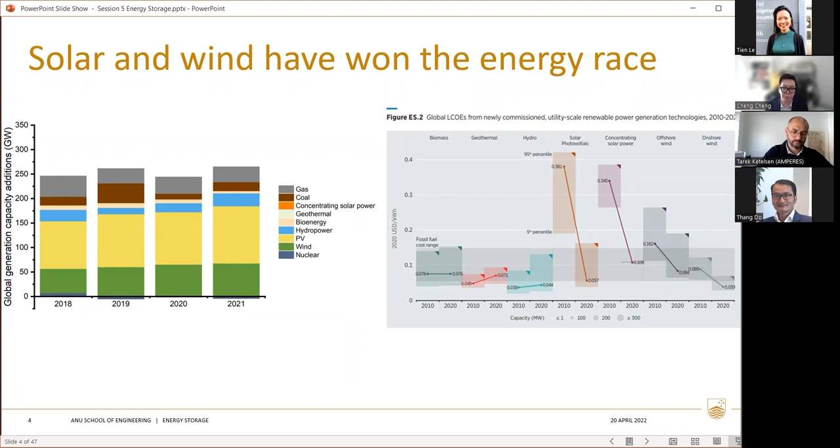First, why do we need storage? This graph shows the global electricity generation capacity addition per year for different technologies. It's clear that solar photovoltaics and wind now account for over half of the global generation capacity additions. The biggest reason for that is the large cost reduction over the past decade. As you can see here, solar PV and wind are now cheaper than fossil fuels in terms of electricity generation in most countries. And solar PV and wind will only become more and more important in the global electricity networks.

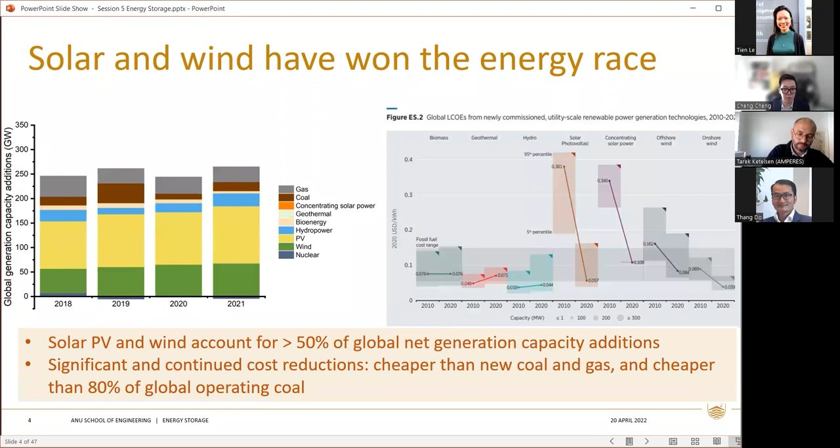Because if you consider other clean technologies, hydro, for example, deployment of new hydro is limited by the number of undammed rivers and some environmental pushbacks, and deployment of new nuclear, bioenergy, geothermal, and concentrating solar power (CSP) continues at low levels compared with solar and wind. It's really difficult to imagine these technologies bridging the large gap to solar PV and wind in terms of global annual deployment rates. And indeed, it's really difficult to see any timely solution to climate change that does not involve solar and wind doing most of the heavy lifting.

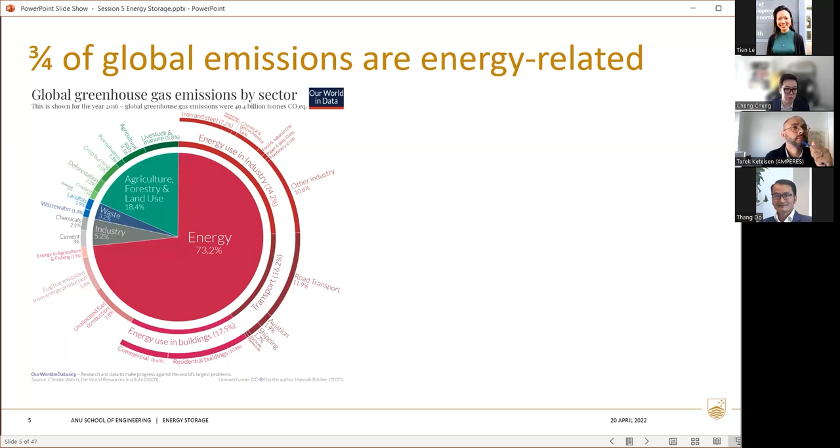The rapid and continued cost reduction of solar PV and wind have led to the wide deployment of renewables globally, as we just saw. That enables the decarbonization of not only the electricity sector, but the entire energy sector. So one pathway to decarbonize the entire energy sector is to first electrify everything that could be electrified. For example, we can replace the gas heaters in our homes with electric heat pumps, replace conventional internal combustion engine vehicles with electric vehicles, and replace blast furnaces with electric arc furnaces.

So when all these end uses are powered by electricity, and all that electricity is generated by renewable energy, solar PV and wind, for example, we could achieve a zero emission energy sector. But of course, there are sectors that are difficult to directly electrify, aviation and shipping, for example. But we will discuss these in detail later when we talk about hydrogen.

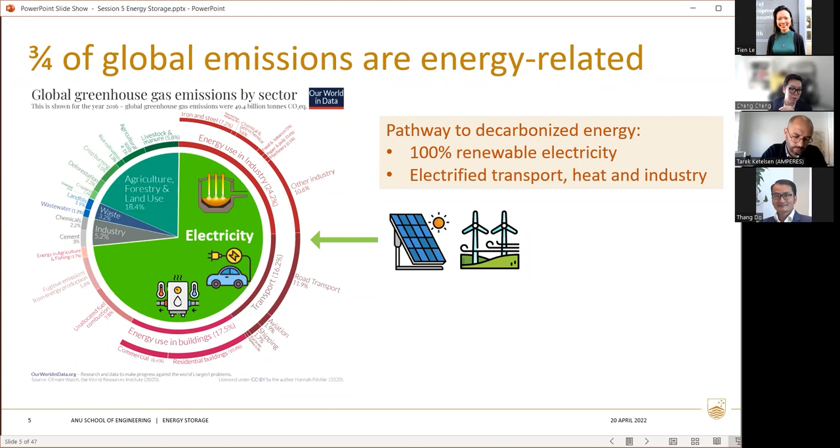However, the challenge is the variable nature of solar and wind. The time when the solar and wind electricity is available is not necessarily the time when the demand needs to be met. So what happens when the sun is not shining and the wind is not blowing? So in a future electricity grid with high level of solar and wind, you need additional balancing mechanisms to make sure that the generation can meet the demand in every hour or every minute or even every second.

And the measures to balance solar and wind include flexible generation, like hydroelectricity, which can be turned on when required to fill the gap between the supply and the demand. Storage: you can store excess electricity when the generation is higher than the demand, and the stored energy can be later recovered when the generation is not sufficient to meet the demand.

Interconnection: you can connect the regions that are hundreds or even thousands of kilometers away by high voltage transmission that can smooth out the local demand and local weather. And lastly, demand response, for example, load shedding or load shifting during occasional periods of low solar PV availability. And the lowest cost solution is often an optimal combination of several of these measures, but storage will be the key and will be the focus of today's session.

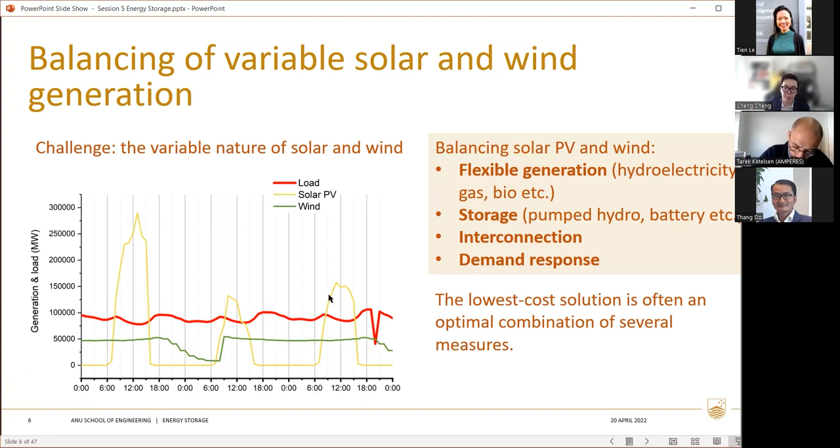So that brings us to the first storage technology that we will cover in this section, pumped hydro. So first, how does pumped hydro work? Essentially, it consists of two reservoirs with different altitude, and the altitude difference is what we usually call the head. And the two reservoirs are connected by a pipe or a tunnel.

So pumped hydro is essentially the reversing of a turbine to become a pump so that the water can be pumped from a lower reservoir to an upper reservoir when there is abundant solar and wind. And in the night when the wind is not blowing, you can then allow the water to come back down the pipe through the turbine to recover most of the electricity, just like how a conventional hydroelectricity works. And about 20% of the energy is lost in the round trip.

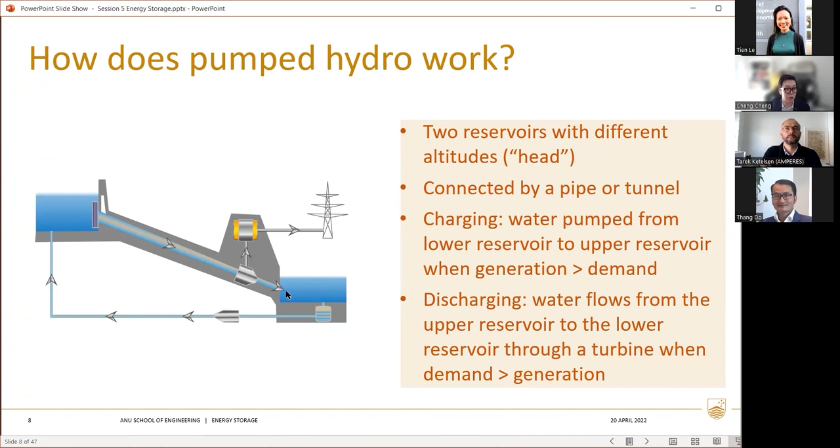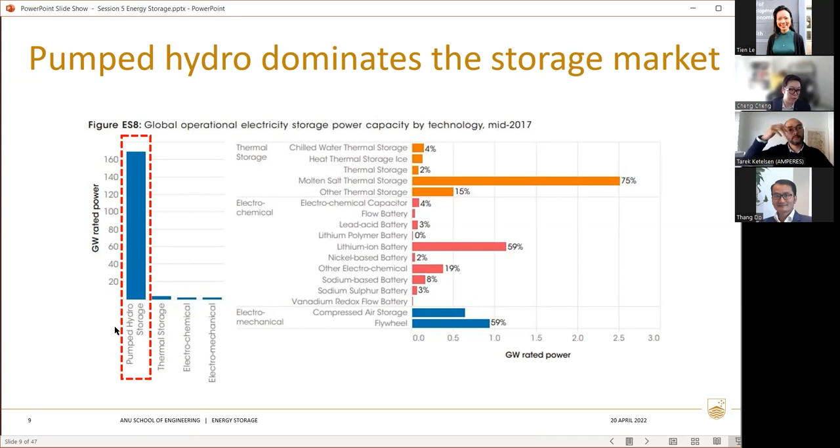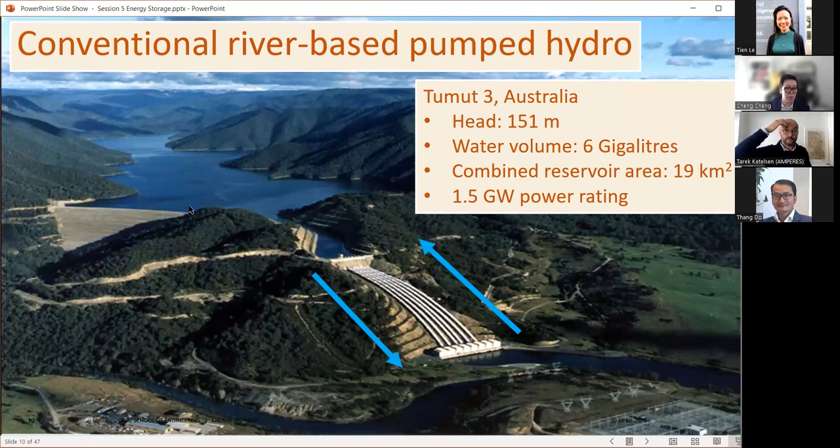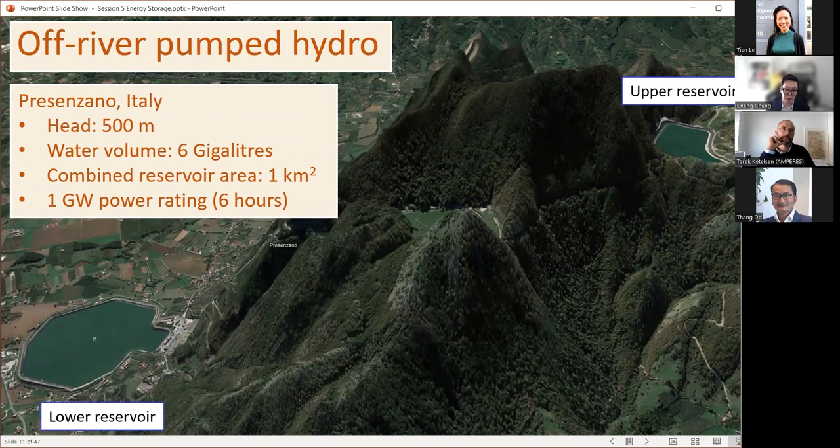So this is an river-based pumped hydro, but off-river pumped hydro is an alternative. There is no river in sight. So this is a good example from Italy. The head or the altitude difference between the upper and the lower reservoir is now 500 meters, similar water volume to the previous with 6 gigaliters, combined reservoir area is just 1 square kilometer, which is 19 times smaller than the previous on-river system. It's got a 6 gigawatt hour rating, and you can run it with 1 gigawatt for 6 hours flat out.

So comparing off-river and on-river pumped hydro energy storage, there are vastly more off-river sites, 100 times as many, because 99% of the Earth's surface is not close to a river, and the reservoirs are smaller compared to the on-river system, so much faster construction. And there's minimal environmental or social impact because there's no interference to existing rivers or lakes. And consequently, there are low or zero flood control costs because, again, you are not on the river.

And importantly, for off-river pumped hydro, the heads are typically better because you can double the head by putting the upper reservoir not in the river valley, but on top of the hill. And if you double the head, you double the power and you double the energy storage, but you don't double the cost. So large head is important for reducing the overall cost of the storage, but we'll talk more about the cost very shortly. And it's worth pointing out that off-river pumped hydro is basically for daily storage.

So if you consider a system, a pair of reservoirs with 100 hectares each, 25 meters deep, with a 500 meter head, they can operate at 2 gigawatts for 12 hours. So if you want seasonal storage, then the on-river system, which is much larger, is probably a better way to go.

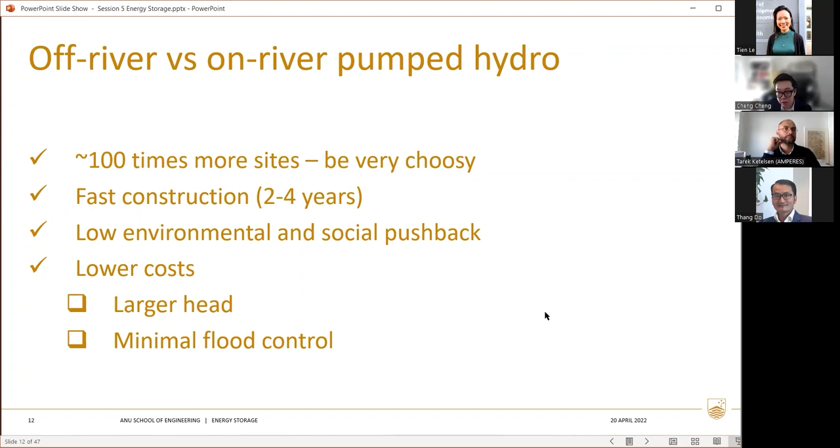So in 2019, our team at the ANU carried out a global assessment of viable off-river pumped hydro sites using geographic information system analysis. And we found 616,000 off-river pumped hydro sites with a combined storage potential of 23 million gigawatt hours. The latitude range covered in the global survey is from 60 degrees north to 56 degrees south, and urban areas and protected areas are excluded from the survey.

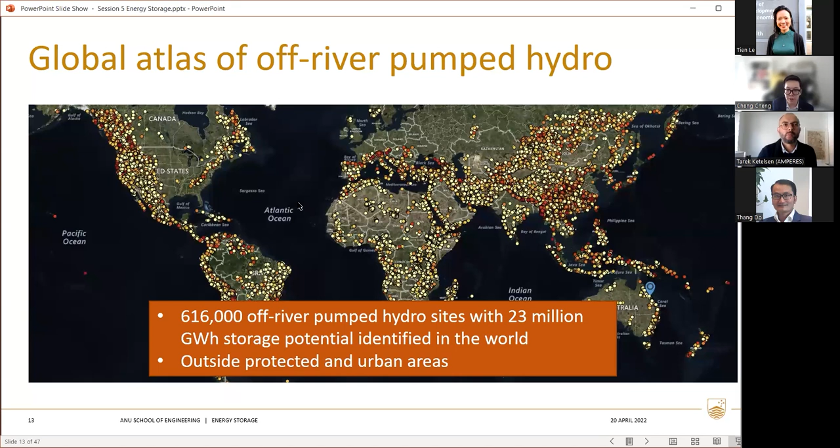So you can go to the Global Pumped Hydro Atlas, you can zoom, you can pan, you can look in your backyard, you can look in a place that you know well to investigate how it all fits together. In the Global Atlas, each site is categorized into a cost class based on its characteristics. Class A sites are the cheapest, and Class B all the way through Class E sites are 25% increments in cost above Class A sites.

If you look at the distribution of the sites across the cost classes, it actually changes with increased storage capacity. Class A and Class B contain the largest proportion of the 150 gigawatt hour sites, while the smaller sites are dominated by Class D and Class E sites. So the general trend is that the larger the system, the more economical it is, although there are exceptions. And the sites are widely distributed around the world.

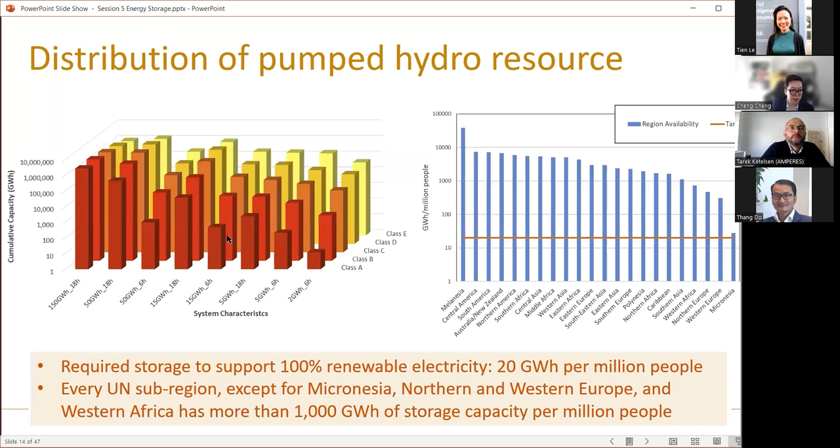This is an example of Southeast Asia: Indonesia, Philippines, and Vietnam have a total of nearly 40,000 sites. All three countries have over 1,000 gigawatt hours of storage potential per million people. This is a lot of storage, much more than needed to support a 100% renewable electricity grid in these three countries. Around 20% of the storage potential is from the lowest cost Class A sites.

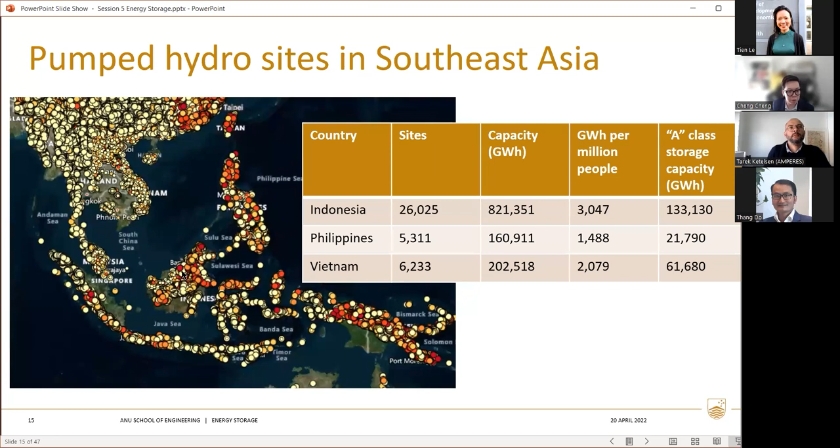You can see from the map that there is a large number of dots. The redder the dot, the lower the cost of that particular pumped hydro system. The dark red dots are Class A sites, and the light yellow dots are Class E sites. You can zoom in to see the upper and lower reservoirs. The upper reservoir is light blue, and the dark blue is the lower reservoir.

You can see the tunnel route connecting the two reservoirs, and you can even see the location of the dam wall and exactly what areas of land will be flooded. You can pan, you can zoom, you can click on either the reservoir or the tunnel route to get a wealth of information about the system and the system components.

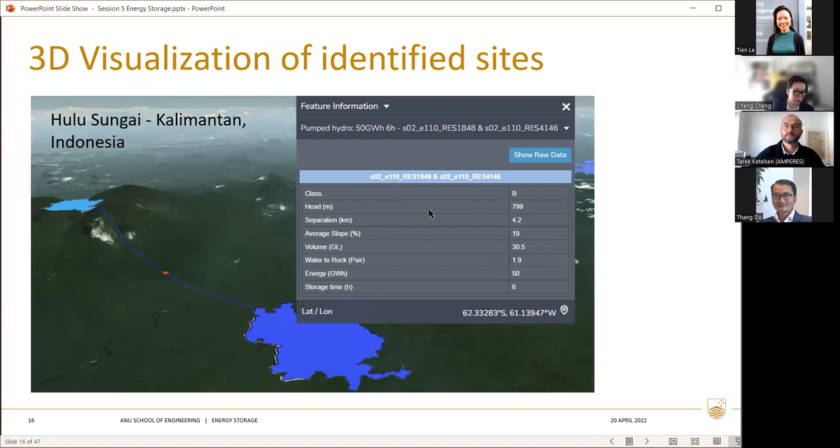This is an example of a 50 gigawatt hour system in Kalimantan, Indonesia. It is a Class B site with 800 meters of head. When you click on the tunnel route, it shows key attributes of the pair, for example, the head, the separation between the two reservoirs, the average slope, etc.

So moving on to the cost, the capital cost. The cost of off-river pumped hydro is dominated by the capital cost, and the capital cost can be approximately divided into an energy cost and a power cost. The energy cost is pretty much the cost of the two reservoirs, and the power cost is the cost of the water conveyance, the machine hall, the pump and the turbine, a generator, and the substation. So the energy cost and the power cost of the pumped hydro can be sized independently.

And starting with the energy cost. The energy cost is dominated by the cost of moving the rock to form the reservoirs, and the amount of energy stored is proportional to the head and the usable water volume of the reservoirs. So if we consider this on a per gigawatt hour basis, the energy cost of the pumped hydro will depend on the head and the water to rock ratio. The water to rock ratio is the ratio of the water impounded to the rock required to form the reservoir walls. So if you double the head or you double the water to rock ratio, they both approximately halve the effective cost of energy.

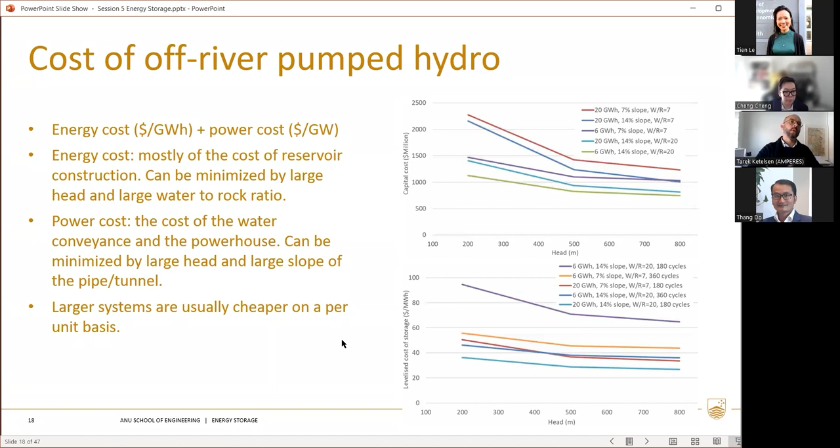And it's important to understand that the land and the water requirements of pumped hydro to support variable solar and wind generation are small. We've looked at Australia as an example, and in Australia, you will need about 3 square meters per person of reservoir area to support a 100% renewable electricity system based mostly on variable solar and wind. And this is much smaller than the area of the land required for the solar and the wind farms that the pumped hydro supports. And the water requirement is also small.

It's about 3 to 10 liters per person per day. And this is pretty much for the initial fill up of the reservoirs and also to make up the losses from water evaporation, in Australia's hot, dry climate. And this is really small quantities of water in the overall scheme of things. They're a lot smaller than the amount of water required for a traditional coal-based power system, because there are no cooling towers.

And this is something you probably know better than me. There were not a lot of pumped hydro projects in Indonesia, Philippines, or Vietnam, but there are proposals to build such systems to support a higher fraction of renewables in the grid. So it's really nice to see this momentum, and I'm expecting to see more projects coming in the next couple of decades.

So obviously in the presentation we've just heard, we've talked a lot about pumped hydro energy storage. The reason for that is that it is a very mature technology. If you look around the world at the moment, you will see that overwhelmingly the storage we actually have in our electricity system is predominantly provided by pumped hydro. But on the flip side, we're starting to see an increasing uptake of other forms of energy storage, particularly battery storage, with lithium batteries as a very significant amount in that category. That's really been driven by the uptake of electric vehicles. Importantly, the batteries in electric vehicles are lithium batteries.

So when we look at these other forms of energy storage alongside pumped hydro, we see batteries, particularly lithium batteries. There are other interesting forms of storage available, things like flywheels and compressed air energy storage. In the pre-readings for this energy storage session, there was a chapter written by Professor Lachlan Blackhall from the ANU for the book around energy transition. If you're interested in other forms of energy storage, I definitely encourage you to have a look at that chapter, because it provides quite a lot of coverage outside of pumped hydro and batteries. Although looking forward, we are going to see pumped hydro and battery storage as the dominant mechanism for providing energy storage in our electricity system.

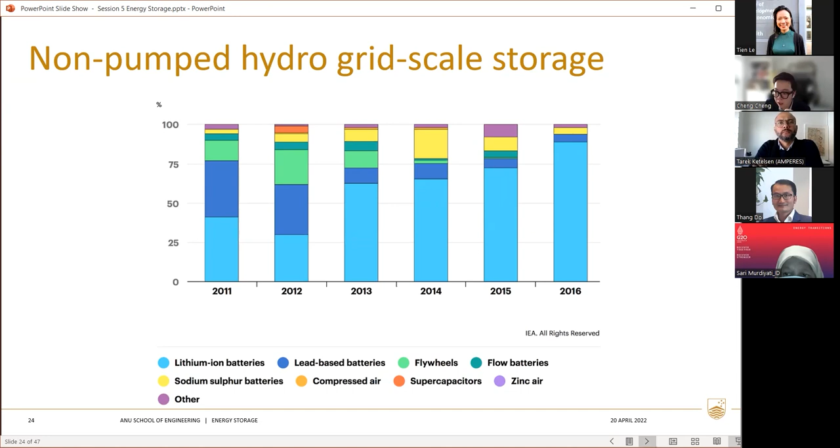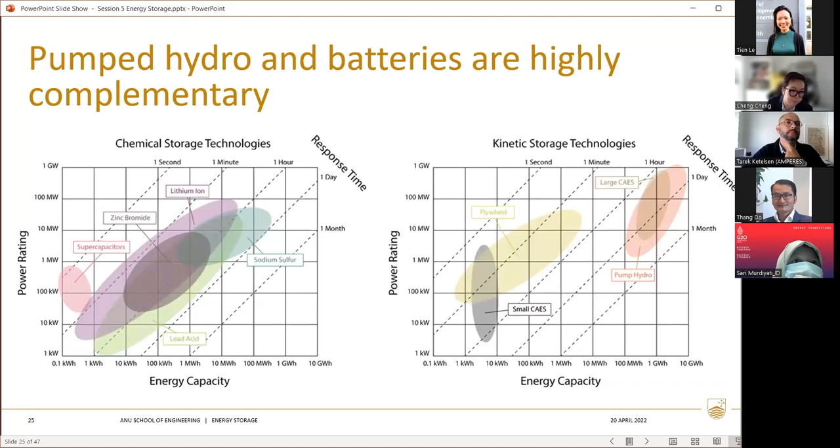As we've seen in many other technologies, particularly solar PV, over the last decade there has been a very significant decline in the cost of battery storage. So battery storage is now becoming one of the really dominant forms of energy storage in our grid. As the cost comes down, it becomes very cost effective to deploy, and that in turn leads to continued deployment of batteries, particularly driven by the use of lithium storage in electric vehicles. Lithium batteries in particular can have high power and a reasonable amount of storage capacity for the scale we're talking about. Because of their various sizes, they can be spread over a wide geography and put in many places in the grid where we actually need them.

And I think one of the big benefits of batteries is that because in many cases they are modular, using battery storage becomes quite scalable. So we can start to deploy storage in small amounts and then continue to expand the scale of that battery storage into our grid as we need it.

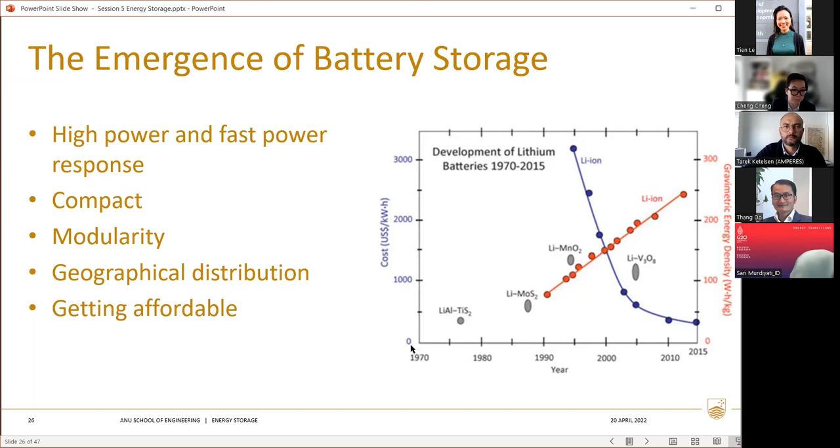So I'm going to touch very briefly on some of the battery chemistries that you come across. I'm by no means a chemist, so please forgive me that I'll talk about this at a relatively high level. I'd encourage you, if you're after more information about any of these chemistries, to get in touch with us through the forums that you've got access to, but also to consult the literature. There's obviously a very significant amount of literature about all these different chemistries.

So one of the first types of battery storage that was deployed, and has actually been around now for close to 160 years, is the lead acid battery. For many of us, we would typically see these batteries in our cars, not so much in our power systems. There has been use of lead acid batteries in the power system, but particularly in off-grid and remote installations rather than in grid connected applications.

One of the challenges of the lead acid battery is that it has a very shallow depth of discharge, and it doesn't like to be fully charged either. Lead acid batteries really like to operate between 30 to 70% of their state of charge, and any more or less tends to damage the cell. So of the nameplate rating of the energy storage, we actually only get to use about 40%.

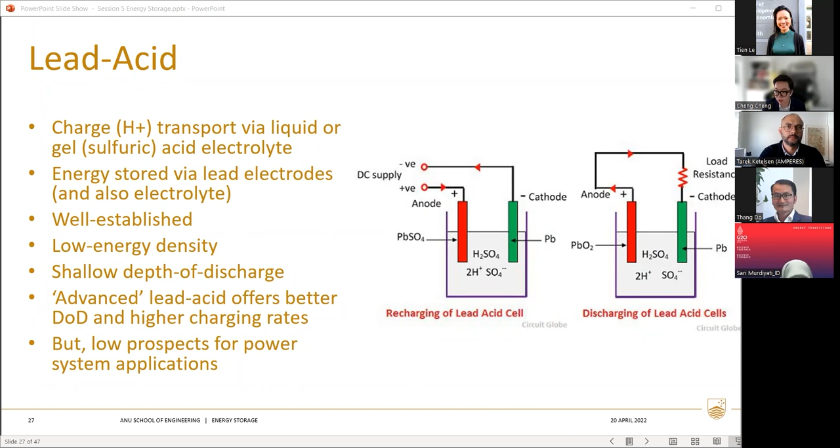I've already touched on the very significant role that lithium batteries play in the grid. Because of their high power to energy ratio and being relatively lightweight compared to other forms of storage, lithium batteries are going to be a very dominant form of energy storage in our electricity grid globally going forward. And because there's so much research and development going on to support the uptake of electric vehicles, we are seeing various different types of lithium chemistries, and there is still a very significant amount of innovation ahead in the development of other lithium chemistries.

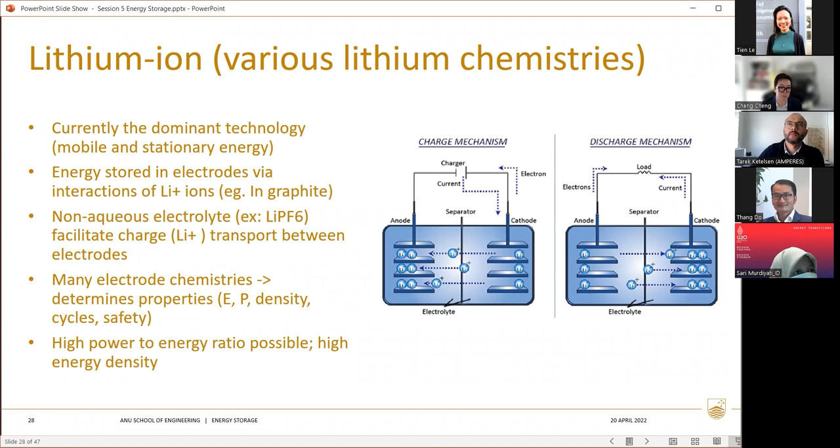The other form of storage that probably doesn't get as much coverage as it should, but will increasingly play a very significant role in powering our electricity and energy systems going forward, is flow batteries. Particularly chemistries like the vanadium flow battery, which was actually invented here in Australia, are probably commercially less mature. They've had a significant amount of research, but not as much commercial development, and they are manufactured at far smaller scale than lithium batteries.

The challenge with flow batteries, as with many other forms of batteries, is that they often contain materials which are not particularly environmentally friendly. So a broad challenge for all types of battery storage is going to be how we ensure that we can recycle and reuse batteries, so that we don't allow the battery materials to simply go straight to waste at the end of their lifetime.

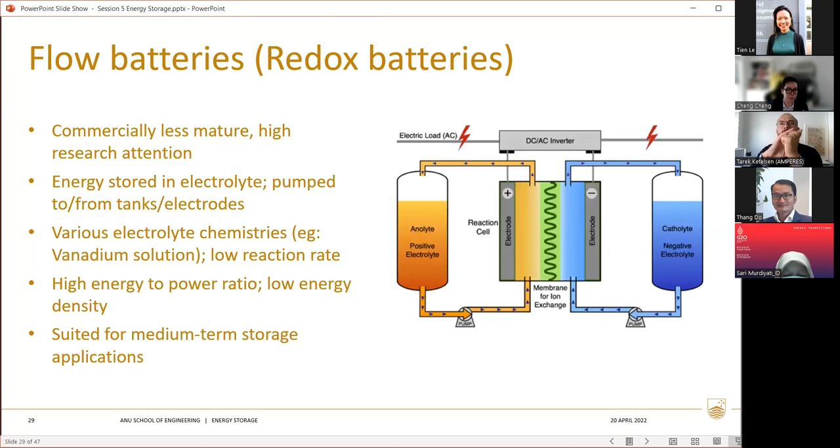And so one of the responses that the government at that time took was to actually install this battery storage next to the wind farm. And it has demonstrated globally the role that battery storage can actually play supporting the way our electricity grid works. So one of the really interesting roles that battery storage can play is that it allows us to regulate the frequency of our energy system. And so this frequency regulation is actually a requirement of our power system. And historically, frequency regulation has been provided by coal-fired or other thermal generation.

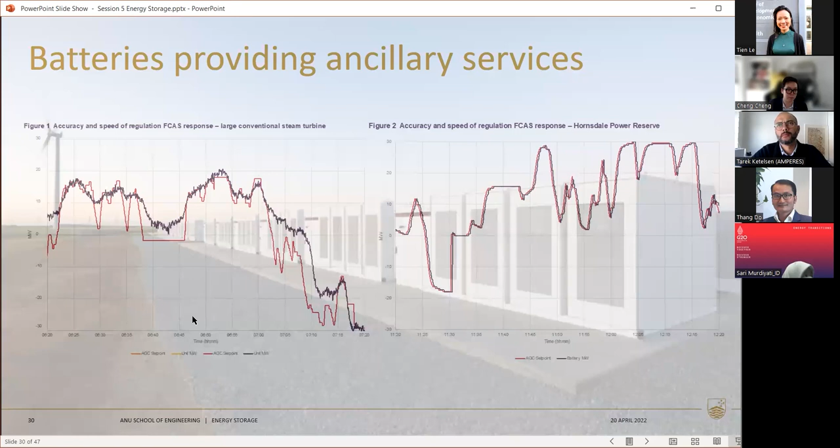And the other place that we are seeing a lot of storage is people installing battery storage in their homes. From 2016 in Australia, we've started to see people installing residential battery storage. People have been driven to install storage because they are keen to capture the solar that's on their roof, because in Australia we have very significant uptake of solar PV. In fact, we have the highest per capita adoption of solar PV of anywhere in the world. And so to understand the role that residential battery storage can play, our researchers at the ANU have done some interesting analysis around the Next Gen battery storage program, which has been rolled out in the Australian Capital Territory where we are based.

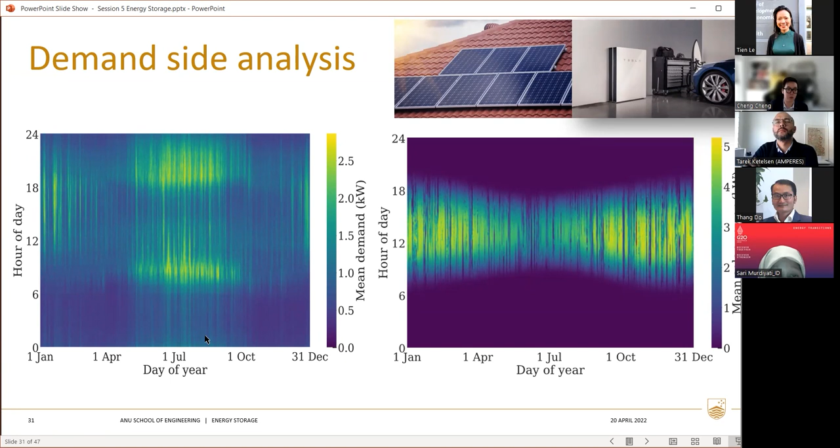And another type of storage I just wanted to highlight is obviously electric vehicles themselves. So when we started the talk, we were talking about how the uptake of lithium batteries has really been driven by the uptake of electric vehicles, because we have so much energy storage in these vehicles. And it's really important to think about how we can leverage that storage for the benefits of the system as a whole. And so, for example, we're actually using electric vehicles from our local government in order to participate in the FCAS market, which I talked a little bit about previously.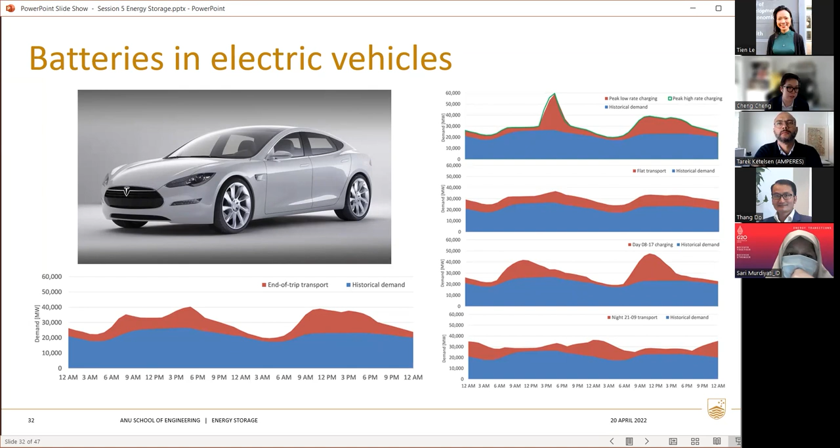And the final point that I just wanted to touch on is the fact that in many grids globally, we are actually seeing a transition away from thermal generation, so away from coal-fired and gas-fired power plants. And one of the challenges we face, which we also discussed before, is that as those large synchronous machines exit the system, we still need to ensure that there's a source of system inertia and system strength.

So inertia and system strength ultimately play a very important role in ensuring that we have frequency and voltage stability in our grid. So we are starting to see now earlier deployment of battery storage that actually allows us to provide inertia and system strength through batteries, through the inverters that connect the battery storage into the grid. And also, as discussed earlier, pumped hydro can also provide some of that system inertia.

And also, we can see that existing battery systems are actually very capable of providing this inertia and system strength alongside all the other important roles of batteries. So we have every reason to be confident that as we move to a 100% renewable energy system, battery storage together with pumped hydro will be able to play a very significant role in ensuring that we continue to see energy reliability and energy security.

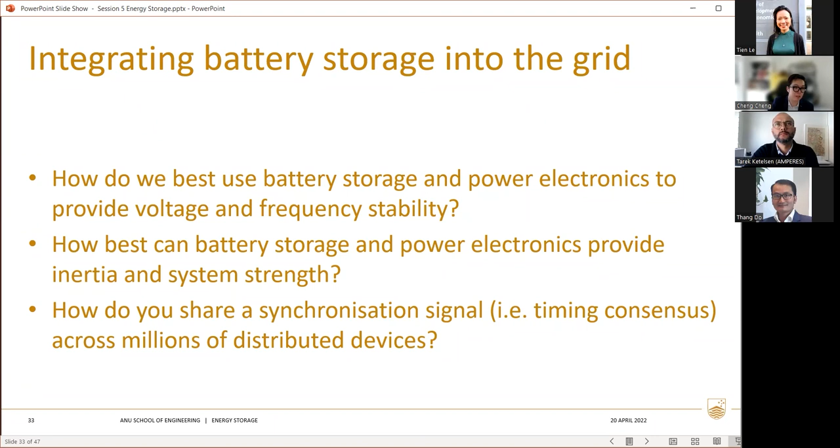So I think this really points to the broader role of what we think of as grid integration. If you think about the assets that we are seeing deployed in our grids, whether it's different forms of renewable generation, wind or solar, solar on people's rooftops, lots of different forms of battery storage, and electric vehicles, of course. How do we coordinate them? How do we optimize how they should all behave and interact so that we get the best outcome for everybody? That's something that's going to keep us busy for many years to come.

So, just moving on to the third topic. So now we've talked about pumped hydro, we talked about battery, and now we'll introduce hydrogen as another way to store energy. Although hydrogen for energy storage, or I should say hydrogen for electricity storage, is probably not the best option. I'll talk more about that very soon.

So if we look again at this energy-related emissions by sector, we know that power generation, transport, and industries represent a majority of emissions globally. And as we've discussed earlier, 100% renewable electricity and electrification is the viable pathway to decarbonize pretty much the entire energy sector. But I've also touched on very briefly earlier that there are sectors that are difficult to be directly electrified, like the iron and steel industry, chemicals and cement, and also freight transport.

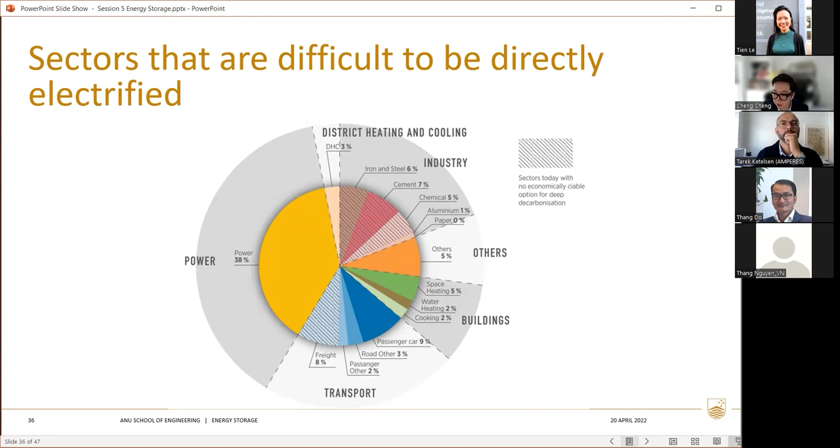And hydrogen can provide this opportunity to convert renewable energy into a source that can help to decarbonize these sectors that are difficult to be directly electrified. So hydrogen can be produced from water. Hydrogen is very light, and so it's not available in pure form in nature. And we need this process to generate pure hydrogen that we need for various applications.

So I will talk about the electrolysis technology in a moment, but basically it requires energy to split water into hydrogen and oxygen. But then when we are burning the hydrogen, this process will generate energy. And the good point about that is that there's no carbon associated with this process because it's just water vapor that will come out of the process, with energy released, of course.

So in terms of the properties of hydrogen, there are a couple of important points. The first is that the energy per unit of mass of hydrogen is quite high. It's 3 times that of gasoline. But on the opposite side, the energy density of hydrogen is quite low. It's only 1/3 of natural gas. So that's an issue we need to address.

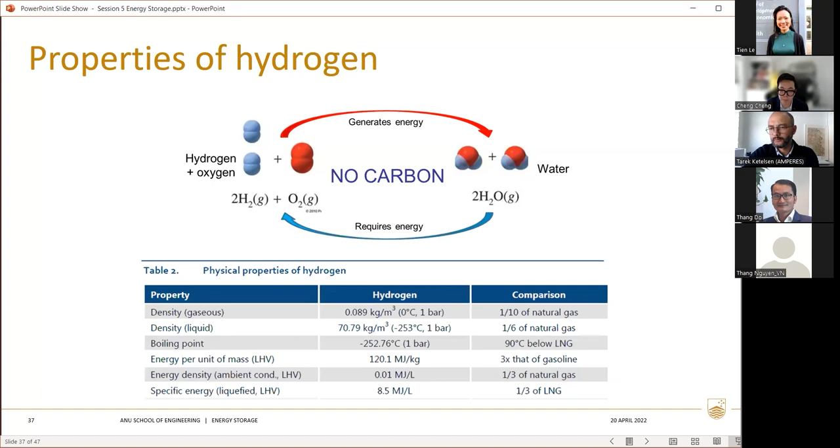So hydrogen could be produced from the electrolyzer using a process called water electrolysis. Again, I'm not going to talk about the chemistry here, but the basic idea is that the water is split into hydrogen and oxygen with the presence of the electric current. So currently there are 2 major types of electrolyzers, alkaline and PEM electrolyzers.

With the current technology, you will need about 70 kilowatt hours of electricity to produce 1 kilogram of hydrogen. But we're expecting to see the efficiency increase so that the energy requirement is reduced to less than 45 kilowatt hours by 2050. And it's worth pointing out that currently the majority of hydrogen is not produced via water electrolysis. Instead, it's produced from fossil fuels, natural gas and coal. But since we are heading towards a zero emission energy sector, these technologies would definitely need to be replaced.

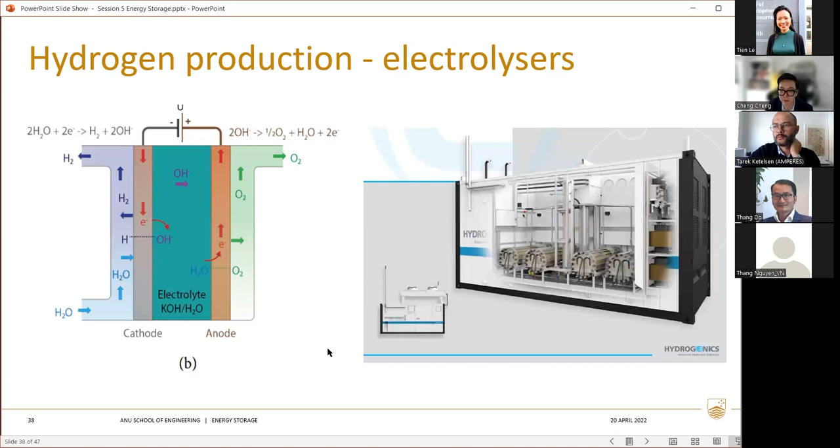And on the other end of the process, we need a technology to help us extract the energy from the hydrogen. This is usually done in a fuel cell, which generates electricity from electrochemical processes. And this energy can be used for heat or for other applications such as fuel cell vehicles or for power generation.

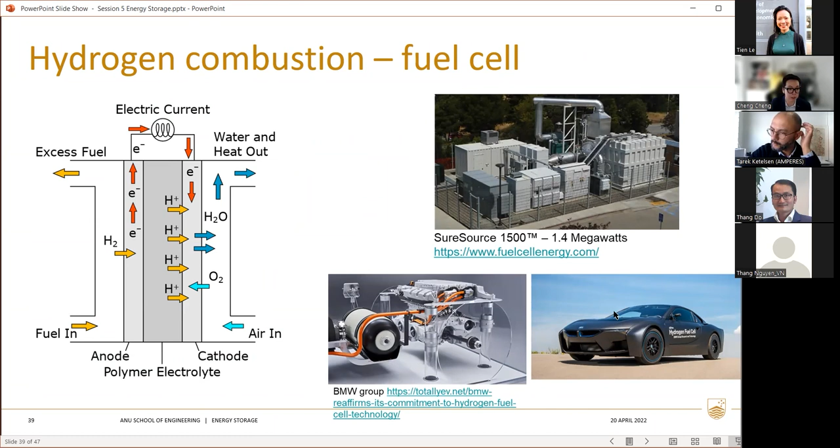So basically, the hydrogen or methane is used where the gas is used for heat or for power generation. You can think about this like another form of energy storage. So electricity generated from wind and solar is stored in the hydrogen or hydrogen derivatives, and then you can recover that energy at a later time.

So in that sense, it can also provide seasonal storage. So if you store the excess electricity from solar in summer and then use it in winter to heat your home, probably not particularly the case for Australia or Southeast Asia, but it could be very useful for Europe when they have very cold winters. And the second option is the industry which needs high temperature heat, and hydrogen can also be used as the feedstock.

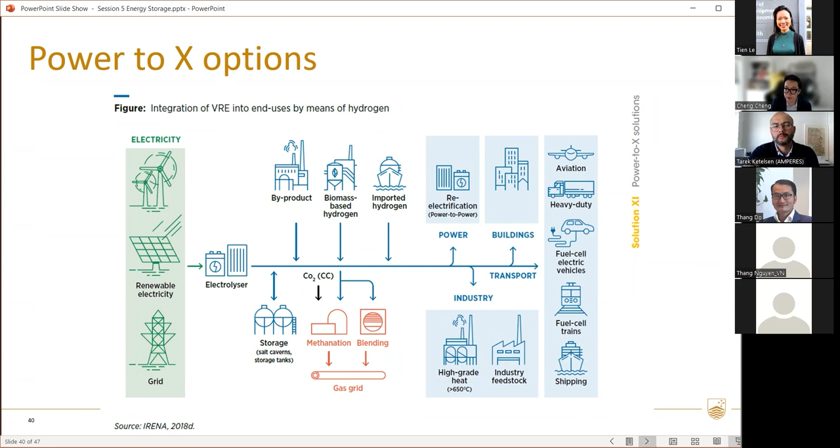So e-fuels and hydrogen derivatives are another potential application of hydrogen. They are basically hydrocarbon fuels synthesized from hydrogen and CO2 or nitrogen. So basically, they are good for the climate because they also extract carbon dioxide from the air. So basically, they are another type of zero carbon energy carrier. Of course, if the hydrogen is produced from renewable energy in the first place.

They can be very helpful because they have very good properties, very similar to their fossil fuel counterparts, because they have very high energy density. They are much easier to store and to transport, if you compare that with hydrogen, which has low energy density. And also there are a wide range of applications, including chemical feedstock, power generation, fertilizer production, and so on.

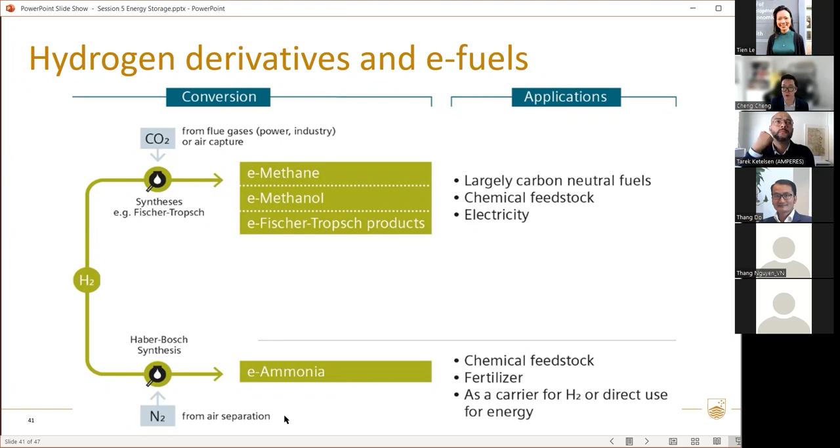But on the other hand, there are some critical challenges. The main issue is the efficiency. So basically, if you're starting with 100 units of electricity sent to the electrolyzer, you first lose 27% during water electrolysis. So 73% is roughly the current efficiency of the electrolyzer. And then the compression and also the fuel cell. And in the end, we get to around 29 units out of 100. So basically around 30% efficiency.

And if you consider the other option of power to gas, so blending hydrogen with natural gas or converting it to methane and then blending it with natural gas, we get to around 21 to 26%. So overall, these energy storage options are only about 20 to 30% efficient. So there is a big loss of energy in all these processes. And as a comparison, pumped hydro is 80% efficient and battery is 85 to 90% efficient. So it's very unlikely that hydrogen will be able to compete with pumped hydro and battery in terms of providing energy storage.

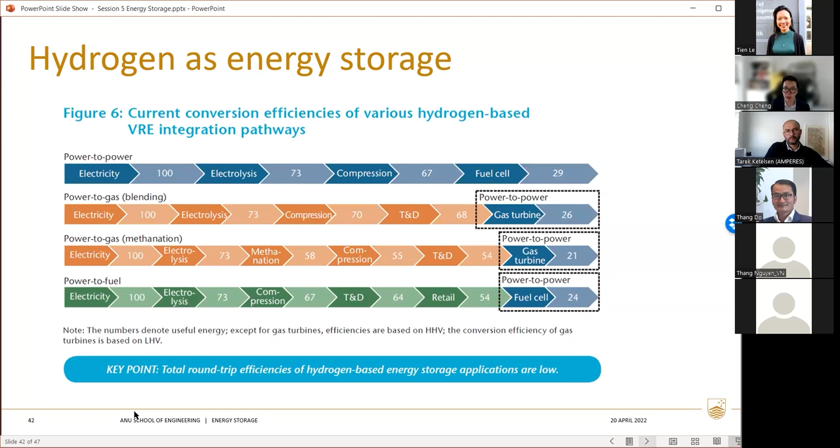And also some more information in certain applications. For example, we can look into transport, and currently conventional vehicles are running at 30% efficiency, while electric vehicles are running at around 86% efficiency. It's a massive increase, and that's why there's a significant trend towards the electrification of light-duty vehicles.

But if you think about using hydrogen to power fuel cell vehicles, and if you consider all the processes to produce the hydrogen, to compress the hydrogen, the efficiency of the electrolyzer, the efficiency of the fuel cell, whether the hydrogen is produced from renewable energy via water electrolysis, or it's produced from fossil fuel via carbon capture and storage, the efficiency is only 41 to 44%, so significantly less than the efficiency of electric vehicles.

If you look at residential heating, the electric heat pump is extremely efficient in terms of heating our homes or heating the water. The efficiency can range between 230 to 410%, depending on the ambient temperature. So the higher the ambient temperature, the higher the efficiency of the heat pump. But if we blend hydrogen into the gas grid and use gas heaters, the efficiency is only 62%.

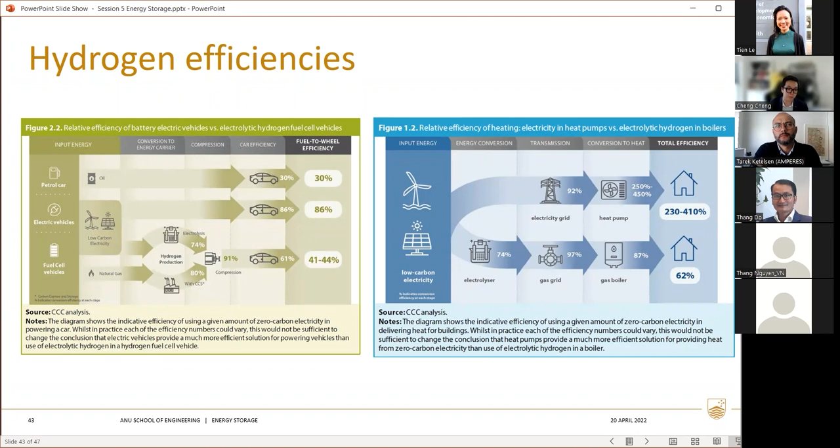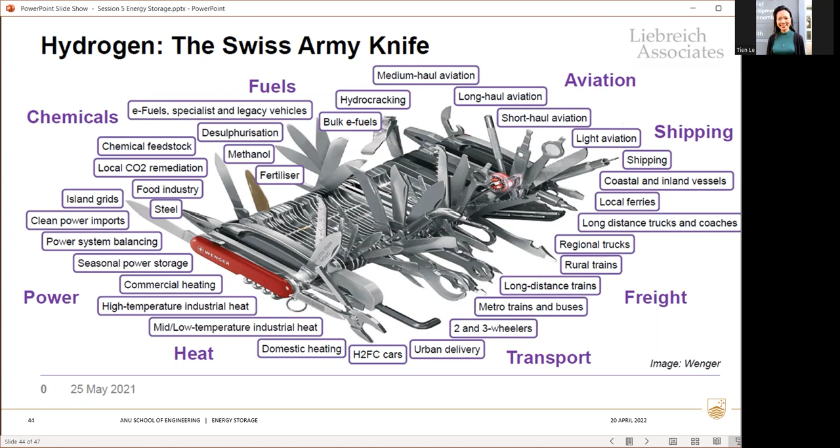So basically, hydrogen has a lot of applications, and many people are calling it sort of the Swiss Army knife, with a wide range of applications, from power generation to balancing the energy system as a storage mechanism, and for seasonal balancing, and for industrial heating and mid to low temperature heating, and for various types of transport. So there's a lot of applications, but at the same time, we need to be very careful that there are other options that are likely to be more energy efficient and much cheaper. So it's really critical to understand where hydrogen is competitive and where it's not.

So people have looked into different options and different applications of hydrogen, and they created this hydrogen ladder. If you look at this ladder of hydrogen, you can see that hydrogen is more useful for fertilizer, for long distance aviation and shipping, because it's just difficult to find another zero emission alternative for these end users.

While on the other side of the ladder, hydrogen for land transport is difficult to compete with electric vehicles. Hydrogen for energy storage is difficult to compete with pumped hydro and batteries. Hydrogen for residential heating is difficult to compete with heat pumps. So it's important to make sure that the hydrogen industry is built around these sectors in which the hydrogen will actually be competitive.

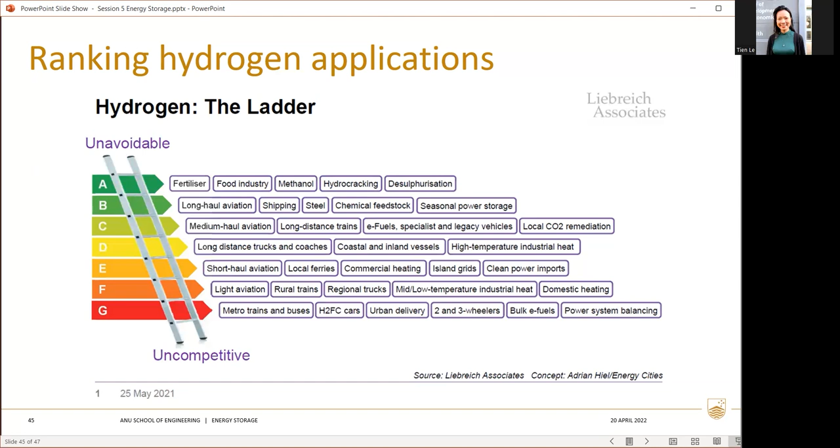So that's a very brief introduction of hydrogen. So now I'm ready to take other questions.

Thanks a lot, Tien. That's really interesting. I like the Swiss Army knife and the ladder analogy at the end there. The ladder one is very useful, I think, as countries think through the role that hydrogen will play. There are so many options, and it's hard to think about it systematically, like the way the ladder presents it.